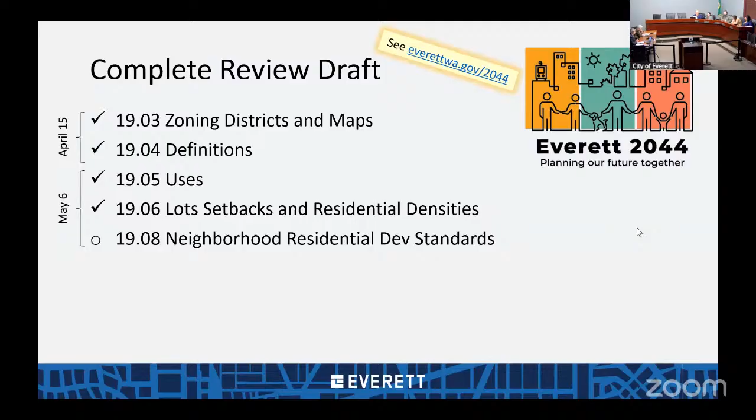Then we started the neighborhood residential development standards, 1908, which has been renamed from something else. We'll pick up right where we left off with 1908 - these are the middle housing standards - and then keep going through the rest of the chapters that are part of Everett 2044 development regulations.

That includes a couple of new chapters that were part of that May 10th book 2, parking being the most significant of them, which was a major update based on changes to state law regulating what cities can regulate for parking. There are more modest changes to the other chapters in the new set.

On the right side of your screen, you see 2 columns worth of chapters that are just code and zone reference updates. If something referred to R1, R2 zones, now it should refer to the NR zones. There are small differences in what was one and what is the other, but they're on the edges. For the most part, we just did a straight mapping from the most equivalent zone. Worth taking a look at to make sure we did it right, but there was no intention of having a substantive change to things in those chapters.

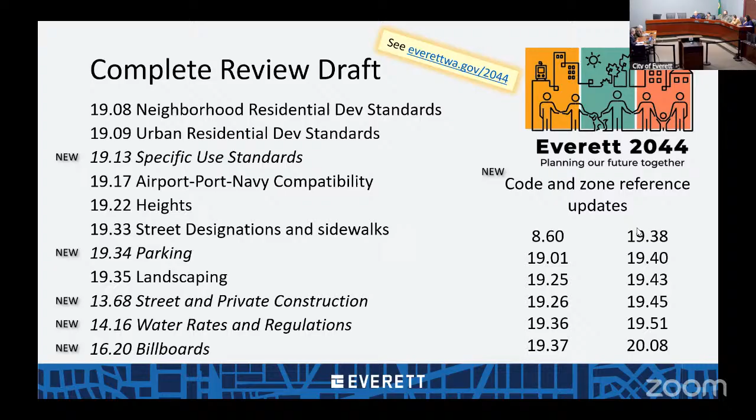Okay, so picking up on 1908 neighborhood residential development standards. A reminder, because this was a question that came up at the end of the meeting a couple weeks ago: where did this come from? Middle housing is required by the state, meaning we allow forms of development in single family zones that have not been allowed for the most part since 1956. So we had to build a whole new set of regulations for how these modestly more intense forms of residential development could fit within our existing single-family character, as is the goal of the law and the subject of many comments we've received. We used the state model, a traditional neighborhood design middle housing toolkit of objective development and design standards, prepared under the direction of the Department of Commerce with consultants Opticos, who played a part in the resurgence of middle housing recently. A lot of these things, especially around shared yards and building orientation, came out of this work, and that's all available on the Department of Commerce's website.

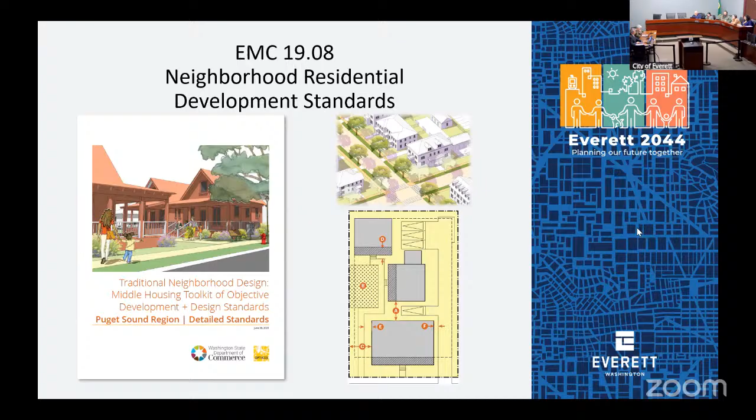Applicability of this chapter: these are development standards in the neighborhood residential and neighborhood residential constrained zones. So all development in those zones, and then also in other zones, development of detached 1 and 2 unit dwellings and townhouses up to 3 stories in height, any number of them. That is also roughly what is captured under the International Residential Code for the building codes. So this is a change. Currently, 1908 is only for the single family zones, regardless of development type. And then 1909 is standards for the bigger zones, multifamily and mixed use zones, regardless of type.

So if you're building a townhouse in the MU zone, you would use 1909 instead of 1908 currently. We have had a lot of difficulties trying to match the building style, and all of the regulations are oriented more towards apartment buildings and mixed use buildings, so they're not a great fit for townhouses. So we are revising the applicability so that all townhouses, detached houses, accessory dwelling units, and those types of things will be handled under 1908.

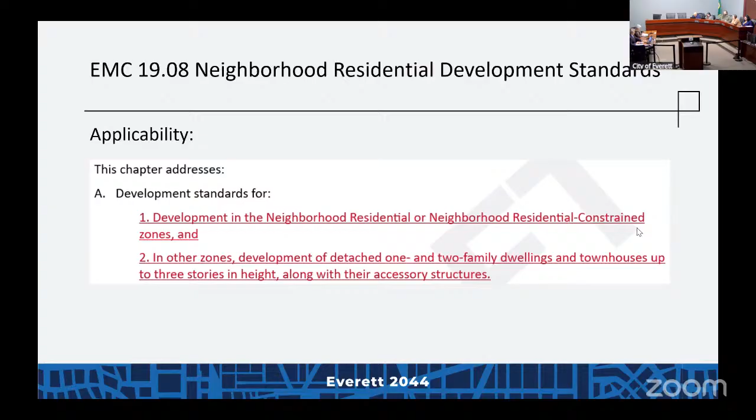Orientation and yards - this is where we left off the conversation last week. Currently in the April 7 draft, we have the top two here, not the third, but this is one we are adding and have penciled into the final draft based on comments received. For the first two: dwellings must either face the street, which includes a street facing facade with the residential private frontage type - different types of porches or entryways - or face a shared yard, which must be 15 feet in any direction, like the image on the screen there. We had some comments that alleys would make a good fronting direction as well, so we've added that provisionally for the final draft, that you should either face a street, shared yard, or public alley.

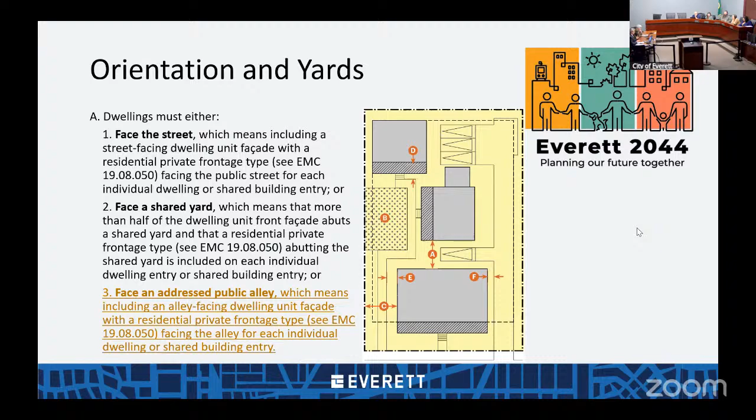Why regulate orientation and yards? We turn back to the design and development goals and policies that we worked through earlier this year, and those include some suggestions on both sides of this. We want clear and predictable development regulations, and in fact are required to. So keep in mind throughout all of this that all of our development standards for housing need to be clear and objective, and we cannot rely on administrative design review or any other sort of design review to say, is this good or not - either it is or it is not. It's not be similar, be quality, be consistent, any of those sorts of things - it needs to be clear and predictable.

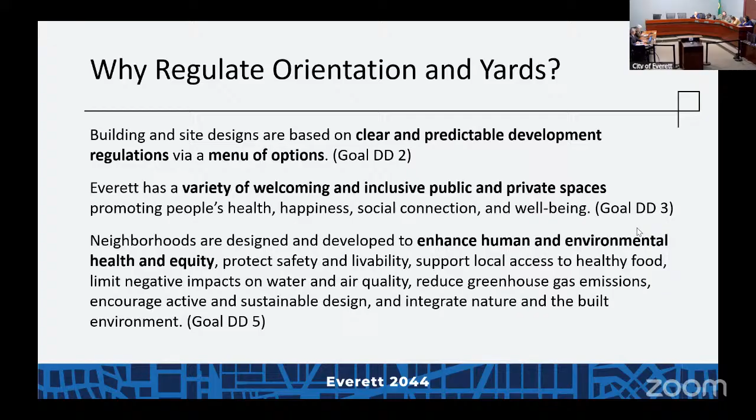We want a variety of welcoming and inclusive public and private spaces. We want to enhance human and environmental health and equity. And then I think the top policy here is probably the number one underpinning policy for some of the orientation and street fronting work we have in this document. So I will read just that one: maintain a continuous, consistent, walkable, and human-scaled pedestrian environment at the interface of buildings and the public realm. Promote interaction between indoor and outdoor activities to create an inclusive and vibrant public realm. In a nutshell, I think that is the purpose of requiring buildings to face street, shared yard, alley, and include those sorts of frontage types.

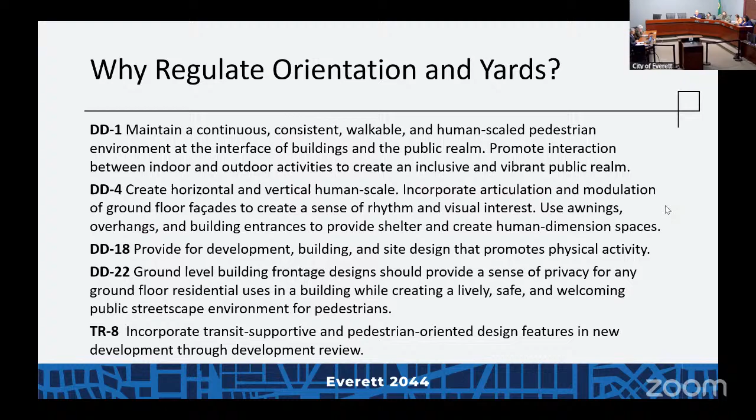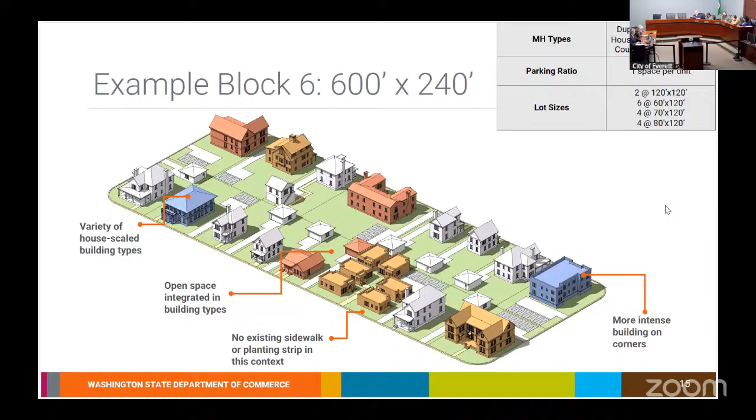Spoiler alert: when we get to the options, staff will suggest we ease up on the shared yard requirement to facilitate different development patterns, but maybe keep the buildings on the street facing the street. So this would be an example of that. If you're walking the sidewalk, you see images like what's around it, but you're not prohibiting, precluding, or limiting the buildings on the interior of the lot.

I think that was the design I was concerned about, because I see the more stacked building design more often, but that solution is good enough for me. That was what I was worried about - how do you make that back unit make sense? But if we're incorporating the shared driveway, making it shared, then that works for me.

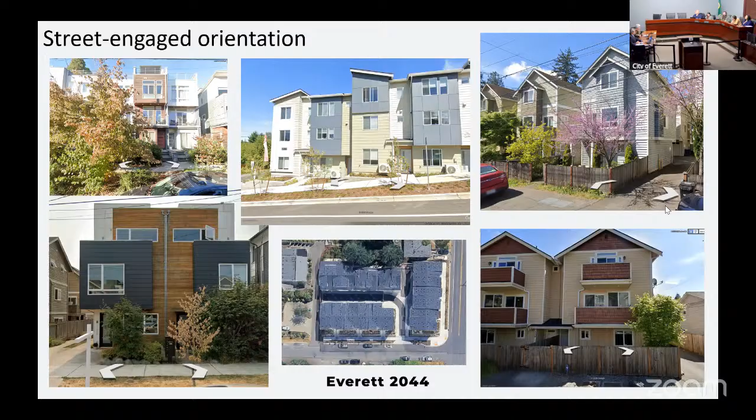Here's another one. Again, you can see how the side units frequently have less visibility, although certainly there are options of design that can have more three-sided openness.

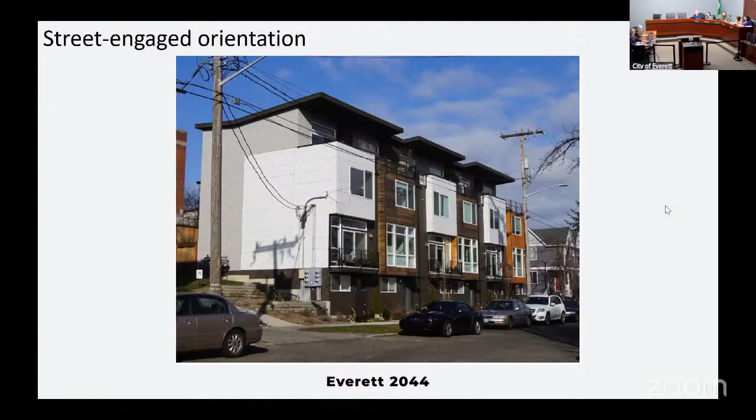Here's kind of the broadside driveway orientation that we're concerned a little bit about, the street presence and the openness, or a cold shoulder to the public street. Fewer windows, no visible entry. Usually they'll be facing, maybe it's a longer cul-de-sac that acts like a road. Every corner lot is going to have one side to a public street and one front to a public street. But for some of these, that is not the case, and it's more just a driveway. We've got an example of that next.

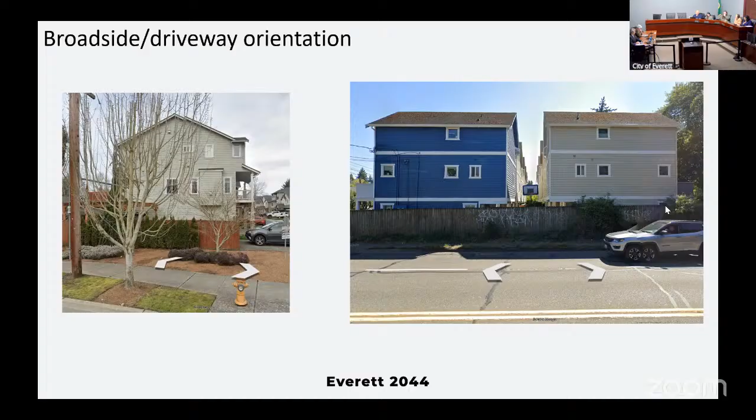Somebody, I think, mentioned this at the last meeting on 5th Avenue West. I don't know if this was the exact development, but it was in fact the exact development. Okay, I figured as much after looking around the area.

So here's one where there is a door facing the street. We need to think about, again, we set the rules and then do not have the discretion. So if you were to say include a door on the street and that's about it, you might get this. I think we do have regulations around having an entry close to, and with a porch on the corner, kind of a thing.

Otherwise, this would be an example of the kind of broadside orientation. Hold on - this is what we're saying you need to do? This is what the current regulations would prohibit, because none of these buildings face the street or anything. Okay, yeah, I just want to make sure I'm following, because this image is not something that I would recommend. Right, right.

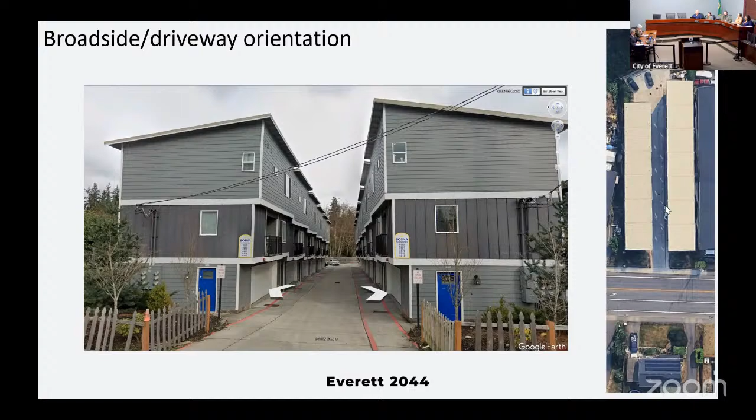But these do have more of a real door on the street, while generally otherwise facing the driveway. You can see how that kind of modulation, if that's the right term, helps break up the mass of the building and everything. You can see what it looks like from above on the side there.

Can I ask a clarifying question on this one? So under the current draft, this would also not be allowed, is that correct? Correct. The current draft with the shared yards and everything would make it almost impossible to have two rows facing a driveway. It would be more like you'd have a row and then a road up the side, and then a cluster around a shared yard, or front to back, those types of things.

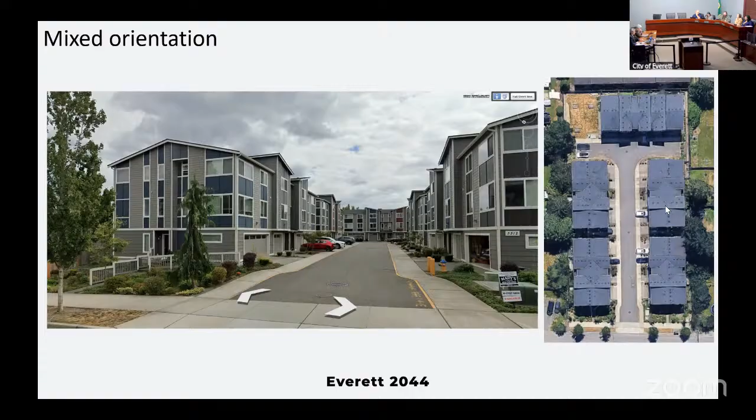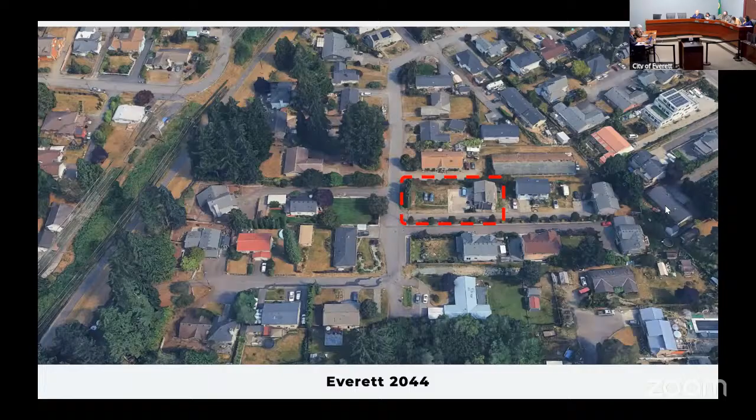And then we've got a case study in Everett, and this is a property that has a lot of the characteristics that we're kind of thinking about. So it seemed like a helpful one to bring through some of the pros and cons of different development types. There's one house set very far back on the lot, and there's a private access drive going to rear developments from a short plat, with another private access drive directly adjacent to it. Property owners were not able to share a driveway or create a public street. So the driveways aren't always touching like that, but it's not uncommon in Everett.

This is what it looks like on our GIS system. The yellow are the couple of shared private access drives and access easements, and some utility easements as well. You can see where the house here is positioned.

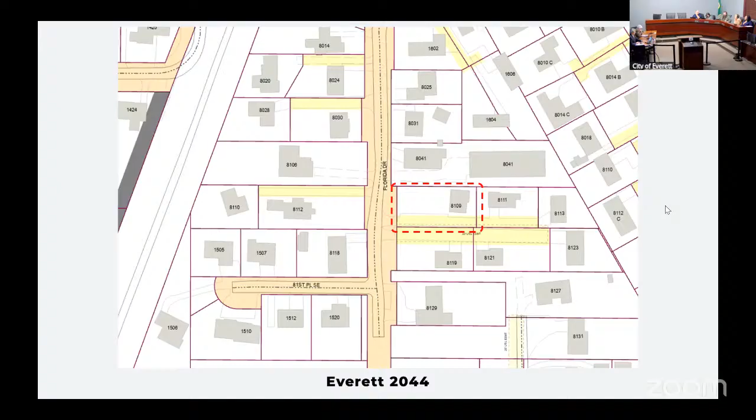Zooming in a little bit, you can see the property, the setback in the neighborhood residential zone. We've got 10 feet in the front, 5 on the sides, and I think staff is going to move forward with a 5-foot rear setback, so we can call it 10 feet if you're on a street and 5 feet if you're not. I actually picked that up from Lynnwood, who's moving that direction as well. And then you can see the access easement taking, I think it was a 10 or 15 foot strip out of the property.

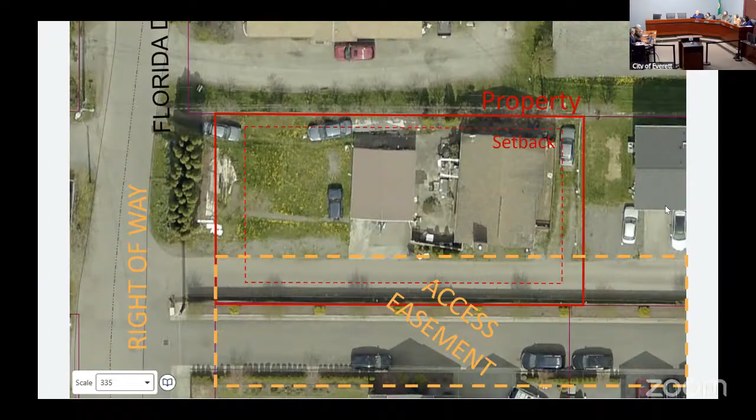So here is a proposed concept for this property that would have 3 sideways townhouses on the street with garages in each one. And then there's 1 bedroom and a bathroom on the back side, and then stairs up to the rest of the living area up above.

So this would be an example where it does not face the street, does not face the alley, does not face the shared yard. So we would have to reject that application under the current draft.

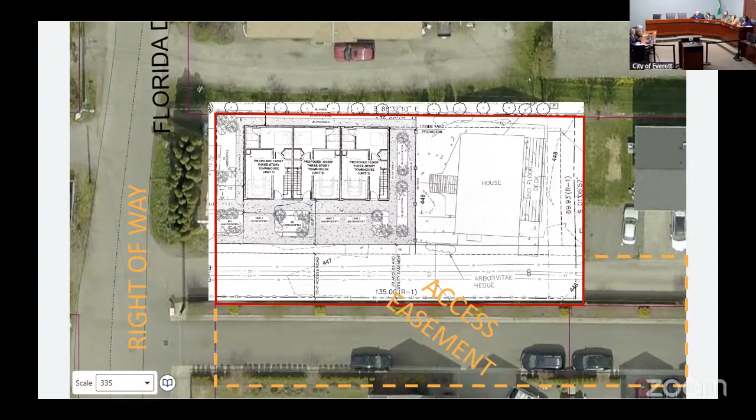So here's a rendering of 3 kind of options here. On the left would be door number 1, and that is the proposal that would be free from street, shared yard, or otherwise orientation requirements.

If you were to turn the units to face the street, you cannot fit all 3 of them. And so you would have a penalty of 33% of the housing on this project. Most likely that 3rd unit is where you start to get into economies of scale, and it probably costs less than the first 2 units, so you're probably pushing the price up for the other ones. Overall, not what we're looking for, although this one would probably have good street presence and would leave some open space for the existing units, or for all of the units, however it's arranged.

And then also, at some point, the house in the back will probably come down, and that leaves a little bit more space in the back for future development. But no denying that it is a cost to housing affordability, and a lot of the indicators we're seeking right now. On the right side is perhaps -- and this is just sketching and trying to illustrate some of the things here.

If we were to require the units close to the street, within some distance -- 30 feet, 40 feet, something like that -- to front on the street, and then everything else does not have to, then perhaps you could get to something like on the right.

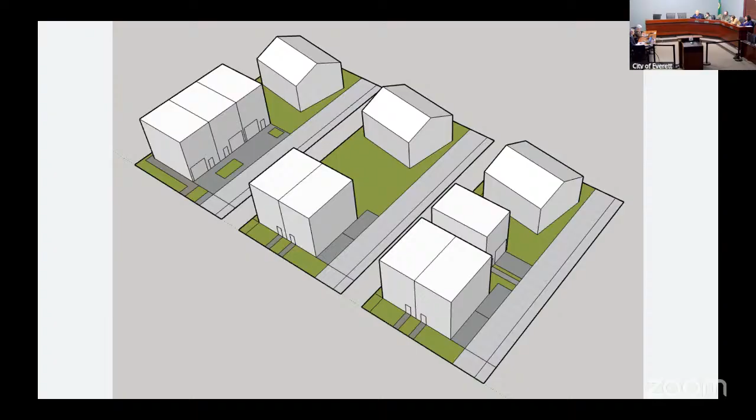On the right, I don't see how that would be possible. I guess you could have the front door and a garage maybe on that middle unit, but the ones on the street would have to have surface parking.

So comparing the one on the left to the one on the right, I would say by separating one of the units, you're probably increasing construction cost a little bit, because you're not having it all be one building -- complexity of the design, foundations, and all of that. How much more expensive or difficult, I don't know, but maybe in public comment in the next few weeks we can get some feedback on things like that.

So that's kind of staff being open to door number 3 and door number 2. We need to think about the wide variety of parcel types. A note about this street: it's a dead end, not expecting a whole lot of people walking by. But on the other hand, it's an opportunity for a cohesive neighborhood feel around that one street.

Kind of like a bigger version of a cul-de-sac. This is in a part of the city that has a lot of deep lots, flag lots, and this is going to be probably a repeated thing here. Other parts of the city, like North Everett, have more 50 by 100 smaller lots, less deep, and alleys.

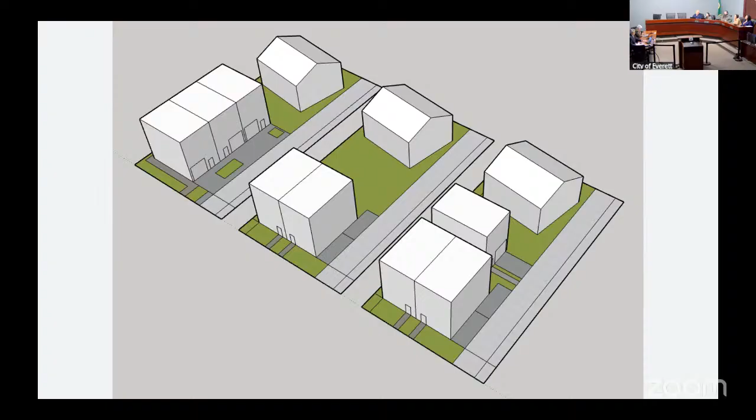So we put up a couple of options for your consideration. We don't need to decide here, but since we were talking about this a lot last week, and we heard some pretty strong opinions from the Planning Commission, we went right back to the drawing board to think about how to take a big step towards more flexibility.

The option to front on the alley was one that we already had going into last week. The second one, to only require street facing for dwellings close to the street, is something that staff would be comfortable with. Then what do you do with the yards?

Do we still have a shared yard, but you just don't have to front on it anymore? That surely makes the site design more flexible and more likely to get our housing production while still having a shared yard. Should that shared yard be in the corner, on the side, in the middle, those sorts of things?

Going to be long and linear, that sort of thing? Or is it just open space, a certain percent in any configuration, whether it's landscaping or not, or none of the above? Those are some points—love to hear any feedback that you have now.

Can we noodle on this for a second and chit chat about it? Okay, I'm trying to do a pro-con list on some of this quickly to figure out: what are we trying to prevent? Not what are we trying to allow, but what are we trying to prevent?

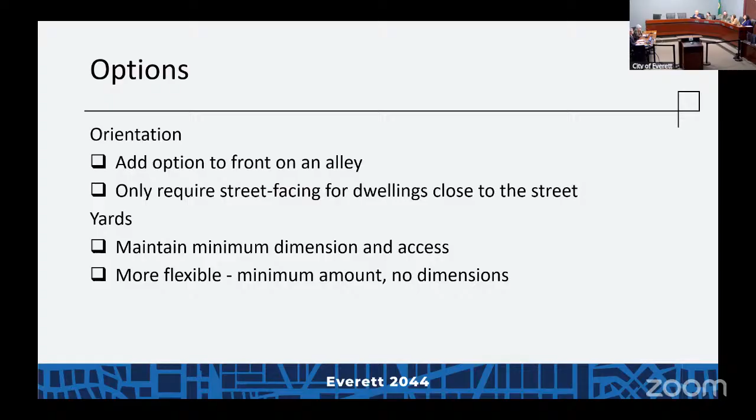Very good. Okay, we've got a lot, so I'll keep moving here. This is all about shared yards, but I think this is pretty dependent on the earlier slides, so I don't know that we need to go into detail on this. And then private yards as well.

I guess taking the temperature on open space and yards in general, do we require any sorts of dimensions? Let's say they're all private yards, or what to do with the remaining 40 to 50 to 60% of a lot that is not covered by buildings.

Are you saying like open space and/or driveway parking? Is that kind of the two things we're looking at right now? So right now we require a private yard at least 8 feet in any direction and 80 square feet, so about 8 by 10.

We have a table in our planning conference room that is exactly that size. So we use it for dimensions a lot to kind of visualize. Essentially 5 feet by 8 feet is the minimum, because we only have 5 foot setbacks.

Well, we've got 8 feet in any direction and 80 square feet. So it would need to be about 8 foot by 10 for each unit, as this draft is currently written. Front or back, or anywhere that it has direct access, including on the roof.

Yep. And then we had the shared yard—if you don't have a private yard, then you have a shared yard that's 15 by 15.

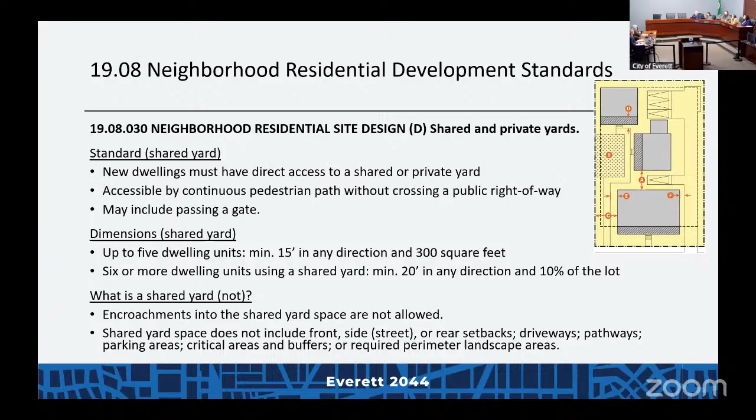Last time we discussed this, there was discussion around whether it's more beneficial to protect public green space and create walkable pathways to utilize that space, rather than requiring individual lots to have their own mini green spaces. I don't think we settled how we felt about that entirely as a commission, but I'm reminded of this conversation now. I think it really just depends on the neighborhood. That's why it's difficult to make this apply across the whole city, because a lot of the neighborhoods are so different. Do you remember that conversation?

Nathan, I'm pretty sure you were here for that. I do. Mackenzie, do you recall that? I think so — I remember us deciding that 30 by 30 was a lot, or at least coming to us with 30 by 30 was a little too much for us. We were also talking, this might be like a year ago, about the bigger zones.

That's the one that requires the 75, and this actually goes back to the park impact fee discussion — when to potentially exempt open space or reduce open space requirements if you're proximate to a public park. Where I sit on that — and we've been debating this in the planning department and elsewhere this entire time, there's no clear answer — I think in the bigger zones I'm very comfortable having the public park system carry the recreation weight, because I'm not seeing very good output from the little sad playground in the corner next to the road. That space could have been used for building and then a good park system. I do feel the opposite for the neighborhood residential zone — what else is that three-quarters of the city if it's not defined by more open space?

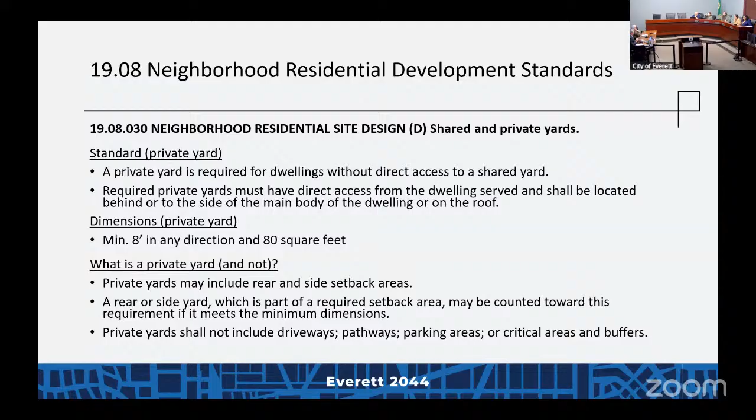Okay, these are all the porch types.

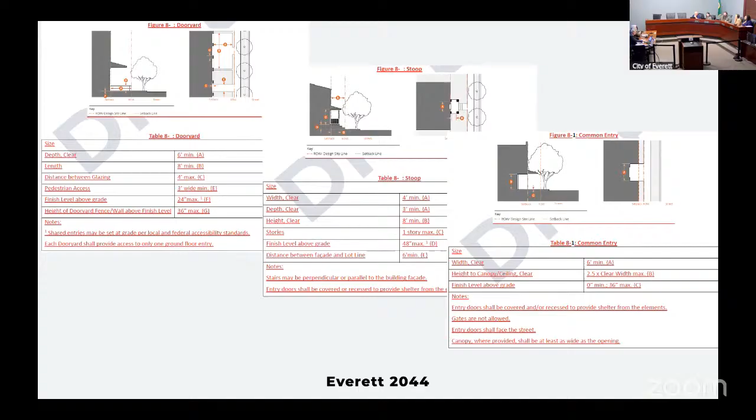Even when people are in close proximity to a park, if you're a parent with young kids, you still potentially want some place for them to be safe close to your own residence, where you can let them out for 5 or 10 minutes, or sit outside having a cup of coffee without having to transport them. So in the neighborhood residential context, that's still a valuable asset to have.

I thought we were done with 1908, but I remembered there was a section on garage requirements relevant to our discussion. This is existing language, though more applicable now in a middle housing world than before, when you couldn't really build these types of buildings. Everything in 1908-060 shown in black is existing language we didn't change, except to clarify that semi-subterranean garages are allowed to project above the adjacent finish grade by up to 8 feet. I'm not exactly sure how that works, but that's from the state's model guidance.

All of these requirements for garages, limiting them to about 50% of the length of the street-facing dwelling unit facade, used to only apply to middle housing in single family zones where allowed, but not to houses unless they were on a small lot of 4,500 square feet or less, or got a front or side street setback exception.

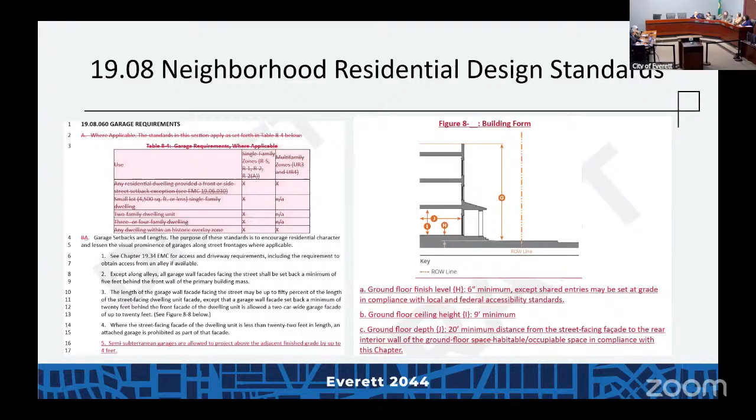And on specific residential uses, just so you know why half of the chapter is red and crossed out, it just got moved to 1913.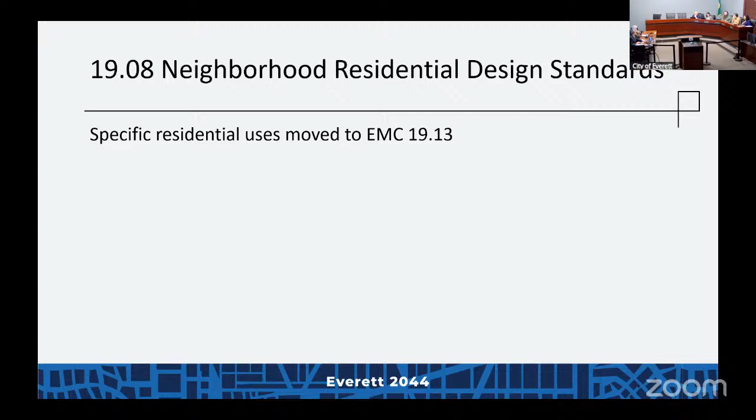This chapter is also where the inclusionary housing requirement sits for 2 areas of displacement risk in South Everett. I wasn't going to spend a lot of time on that since we discussed it in earlier pieces, but if you'd like to, we could.

Just a quick question on that. We did hear from a lot of folks in the community in those areas at risk for displacement, and the recommendations brought to us through that community engagement process - is there any part of those recommendations that we are not choosing to incorporate?

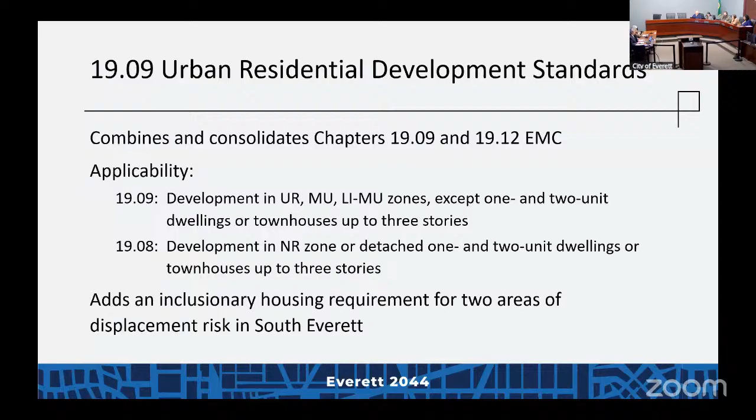Is it owned and controlled, or just owned? Because control is different if it's already built. Owned or controlled - that could include land that is leased by long-term lease, which would be controlled but not owned. I think those were the two main ones, but otherwise we got the other ones. My apologies to the community if I was missing something - we will be rereading through all of that in this final couple weeks.

Okay, building modulation, more flexibility. Existing regulations have upper floor step back requirements that have been driving architects crazy ever since I've come to Everett. You can see some images of what that looks like - these are 140 foot by 200 foot lots if you were to build all the way out except for the last 3 feet of your property. On the left side is 7 stories, on the right side is 25 stories, so UR7 or MU25 would be examples. You require a step back at 10 feet at floor 4 or 5, and then another 10 feet at a higher floor.

Lots of downsides to that - water intrusion problems. You want to have all of your units stacked so the plumbing goes up in a straight line and all kinds of things. Yes, it brings some architectural interest and can provide some balconies, but there's an overwhelming negative response from architects and not a whole lot of value that we see.

We are in no danger of canyon streets with the width of our streets. So we proposed pulling that back fairly substantially and instead just requiring, with eyes on the street in mind, some sort of balcony or outdoor area 8 feet deep on 50% of the horizontal distance, somewhere at floor 2, 3, or 4. We were trying to hit the break point between concrete and wood so you didn't have the water intrusion and stacking issues. And your required outdoor amenity space may as well overlook the street, where again you can have some eyes on the street.

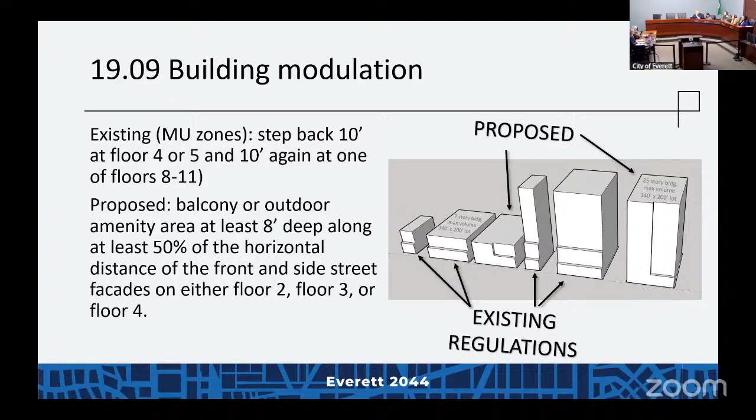Yes, thank you. We have scratched our heads a little bit on this - it came out of Metro Everett, came out of some other things. It's tough because we don't know who really wants this, so if they're out there, come forward. You've got 5 weeks, otherwise this is gone. Sounds good, okay.

We removed a couple others that have been frequent, and a lot of these standards are modifiable, so you can request a deviation from it, and we have been granting those deviations, finding that it meets the criteria.

We require that residential building facades look like a series of buildings no wider than 50 feet each, proposing to remove that. Removing a requirement for some balconies and balustrades to be opaque. I think this was so that you can't see into a neighborhood residential zone next to you, but it didn't seem to really serve that purpose well, and actually can be negative in that sense.

In our air quality work, reviewing the plan against the environmental review process and looking at pollution burden and things like that, a lot of research went in. I think we talked about this in the Planning Commission.

So a lot of research on proximity to high traffic roadways shows it's very bad, especially for kids. We did not get to any sorts of restrictions on childcare on Evergreen Way, which is something that still kind of bothers me a little bit, because the research is pretty strong on the negative effects. But at least the playgrounds or that open space required for a building should be on the other side of the building from something like Evergreen Way.

We reduced the dimensions for the private open space required just to better fit a reasonable, common, economical balcony size. So it doesn't have to be 6 feet deep, it can be 4 feet deep. And then I think that was 4 by 8 or something for the balcony size there.

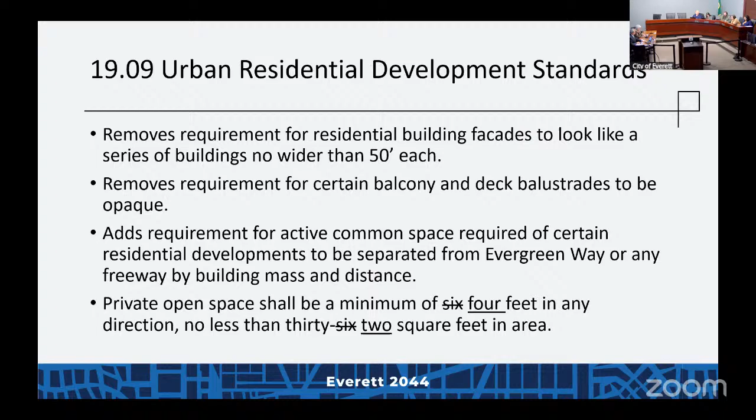We removed the restriction on ground floor residential on TOD streets — Pacific, Everett Station, a lot of other places. We definitely want to see active uses on the street — healthy city, vibrant streets, eyes on the street. But simply prohibiting residential does not seem like the right way to do it. You're more likely to get blank walls, and not everything can fit commercial. So we did not add any new requirements to fill that space, but we did remove the prohibition on ground floor residential. That's actually in 1905, but it really impacts these types of buildings.

Is there any prohibition — it seems weird to me but I'm saying it — if you have a longer street-facing first floor, that some of your building is residential and some of it's commercial, no prohibition against mixing those two ground floor uses at all, right? Building code might make that difficult in some way, but nothing in the land use code, and maybe not even the commercial code at that point.

That number applies to buildings here in the commercial code. The table that you see on the bottom is existing language that requires minimum building depth on the ground floor, and that would be building available to any use.

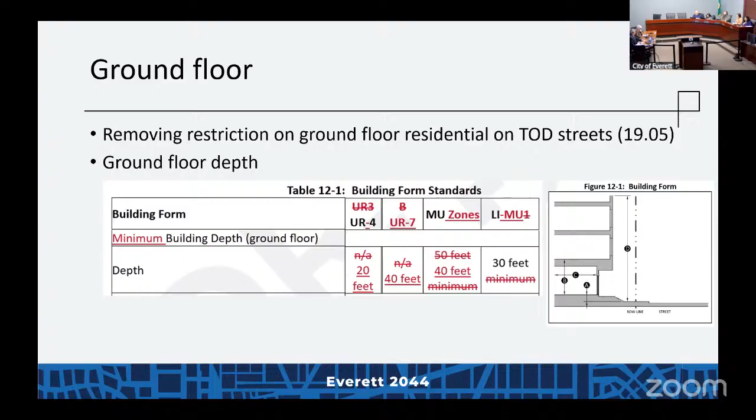Then there is this table 12.3, with a lot of standards for facades — I don't know how to summarize this other than to put it up on the screen. I note that the business zone being collapsed into the mixed use zone means that some parts of Evergreen Way and Everett Mall Way earned themselves some articulation requirements and blank wall standards. Otherwise, no change to the MU zones or the UR zones.

Is this where — sorry — the window requirement for large buildings, transparency? Yes. Is that in this section or a different area? That is in this section. Did we reduce that 90% number? I don't think we did. I think that's something we've heard frequently, that especially the 90% is bizarrely high. That is in the table that I mentioned, where I just found the duplicate.

So it's in 1909, and was in 1912, and is also in 1934, the street designations. So there's a chance it says one thing in one and a different thing in the other — there were already some discrepancies between those two that we needed to clean up. So we'll be deleting one of the tables and consolidating into one. Weather protection and transparency are the two — we get more concern about transparency just because of the cost and the energy code.

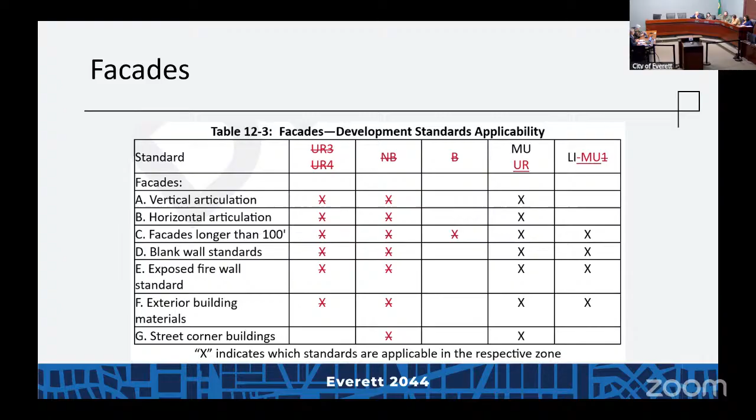Structured parking - these are existing standards that only regulate the front building facade, and we're proposing to make that apply to both front and side streets. The front is always the narrowest side. You'll see there's a couple developments - one being built right now on Pacific, and a couple others in the pipeline that are long parts of the block. All of these standards that had applied only to the front building facade only apply to the Pacific side, but not at all to Rockefeller, Lombard, and all the rest.

That seemed like a big miss for what the goals were for these, so we just crossed out 'front,' which will bring in the side street applicability. This only affects corner properties, specifically the ones that are long and skinny, full block ones.

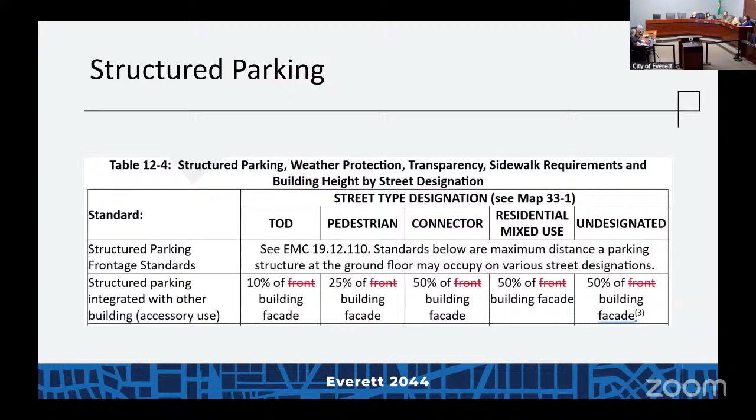Okay, that was 1909. Anything we wanted to go back to? I think we're doing pretty okay on time. I did have one question.

I know there's been some public comment focused on North Everett, like the 19th corridor we were talking about, and that turning into UR4, and how that interaction might look with the rest of the residential neighborhood, like what the transition between those two zones might look like. I know we've talked a little about transitions and heights, but as we're talking about 1909 versus 1908, just wanted to talk through that.

The transition, I don't think we have it—it's on a future slide, so we'll see if there's a height reduction for adjacent, but they're so similar: 45 feet, maybe even 40 feet in UR4, 35 in NR. And then there's the 100% lot coverage—I was working this out earlier today. UR4 has no front setback, but 5 feet on the side and rear. If it were a 5,000 square foot lot, that already drops you to 75% lot coverage, if the math was right, just because you can't be in the setbacks. So now you're talking a difference of potentially 60% to 75%, 35 feet to 40 feet. And it's hard to get up to 75% with driveways and parking areas already set, or the 100%. So I don't see those two... In fact, UR4 is kind of designed to be the middle ground between the taller zones that have some compatibility concerns and the neighborhood residential. I don't think there are many special treatments, but that would be one to look at the landscaping chapter for.

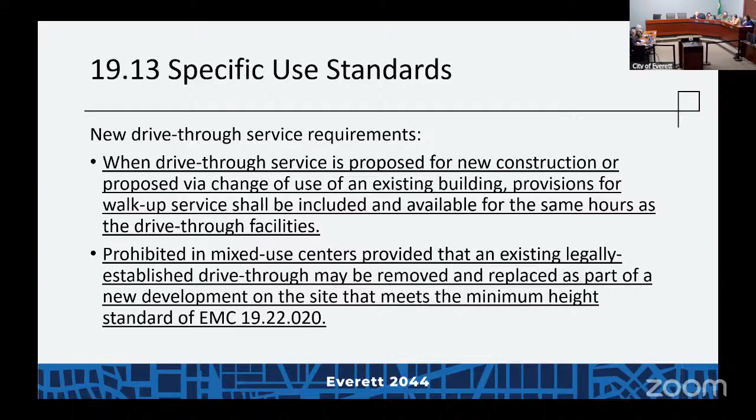I think that's that. Keep cruising—airport, port, Navy compatibility, we've talked a lot about, so I think we could probably breeze through this one. But I have very exciting news: the Rucker Hill neighborhood and the Port of Everett have come to agreement on terms between the two sides. So that will be folded into the final draft, and that will discharge that specific amendment request. I feel like there should be a confetti burst or something. We'll ask them to blow a foghorn or something.

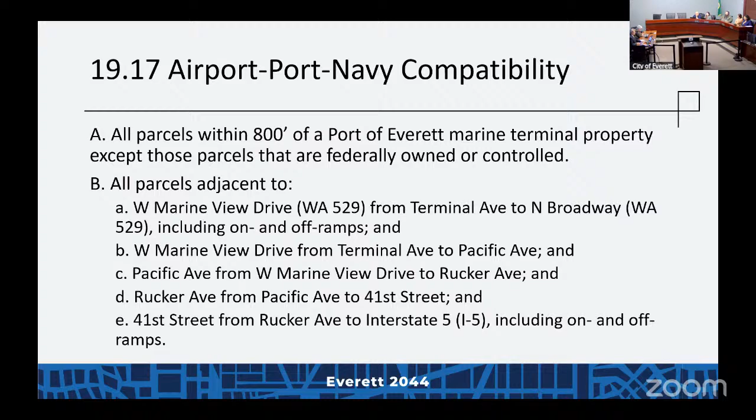Okay, heights. Again, we eliminated the building height map. We have an intended number of floors and a maximum in feet. The intended number of floors doesn't really do anything now, but it puts on paper what the intent was.

One example is we're learning about modular construction, which has taller needs—I think it was more like 12 feet instead of 10 feet. So that means if you're building modular, you cannot quite get 7 stories in the 75 feet that we have in the UR7 zone.

I don't know that we want to make changes to the maximum height at this late stage, but by putting the intended number of floors, that can be a guide to smooth the path later down the line, or maybe with administrative deviation requests or that sort of thing.

The formula we used for converting the number of floors—UR7, 7 floors, that type of thing—is 10 feet per floor, and then 5 feet on the ground for residential zones, or 10 feet for mixed-use zones for a taller commercial ground floor plate.

Light and heavy industrial zones were set to a flat 100 feet, not often reaching for the sky, although they do have cranes and smokestacks and things like that that fall under this. The light standards at the Norton terminal at the port needed a variance, or maybe it was just the industrial waterfront height incentive. Either way, light poles count as well, not just buildings.

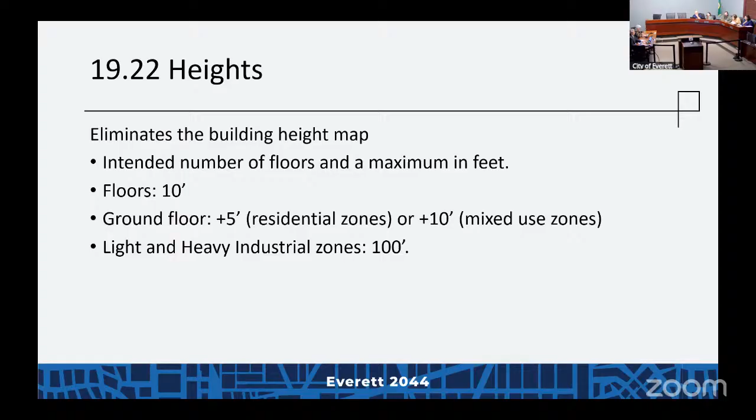So light and heavy industrial zones, 100 feet. For the most part, these are not going to be objectionable to anybody, but we have waterfront industrial zones all around, and in our current building height map those have lower heights. Existing is about 45 to 75 feet, and then the additional 20 feet for certain uses with a view analysis. That's what the port used for the light standards at Norton Terminal.

We were proposing to replace—since we're dropping the height map, you need a height limit for the light industrial or heavy industrial zone. So we went with the higher end.

But in the waterfront, recognizing the view implications and the shoreline implications, we're suggesting some trigonometry or geometry where you start at the street at the top of the bluff, 10 feet below the center line, and then you go 40 feet above the ordinary high water mark, and that's your plane of height. So taller closer to the bluff where you're less likely to interrupt the views, shorter closer to the water.

The port is probably one of the most sensitive to this because of their need for cranes and other tall things. I think this wound up with a slight decrease in their height right at the shoreline that we need to take a look at. We're working with them on that. That could involve the additional 20 feet for certain uses with view analysis. Those certain uses are water dependent uses, and the view analysis makes sure that you're not going to block a substantial number of Olympic mountain views.

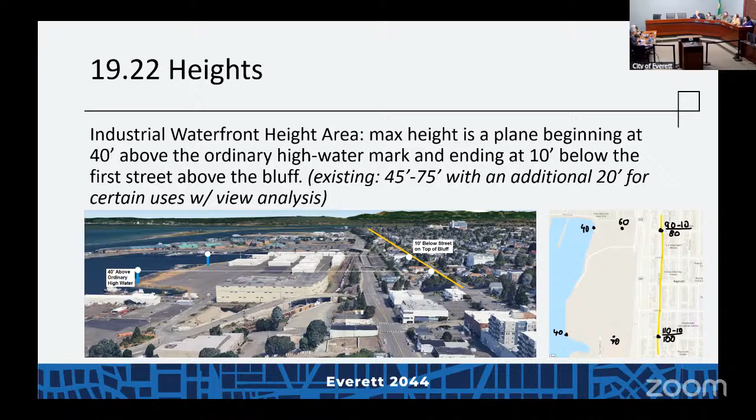That's around the light standards. Right, light stand, and we have a view analysis from several streets and everything.

Here are the height reductions. So from the development site zone—this is the one that UR4 is not in, but if it was a UR7, and there are not many because we have mostly the wedding cake style—where you have a UR7 development site and the neighbor is an NR zone, for 50 feet into the UR7 zone you would be limited to the 35 feet of the NR zone, so that you would limit the very tall buildings next to very short buildings.

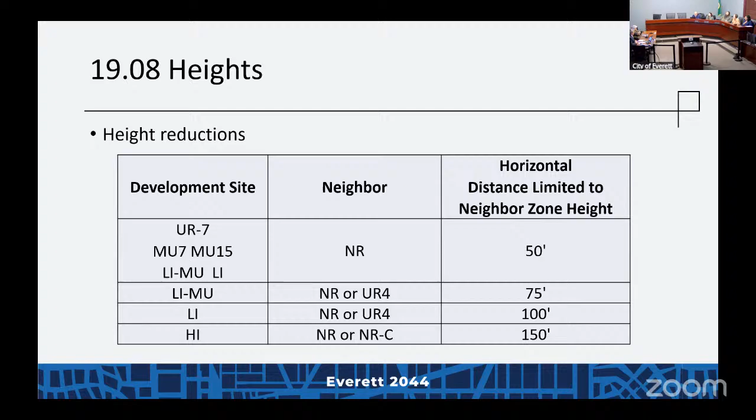This is pretty similar to what we have now, just with the new zone names.

From height reductions to height incentives, we removed the entire development height incentives program. We want people to build taller buildings more efficiently. They are more expensive—it seems a little bit backwards to require them to pay for what we're looking for. So all of the height limits are now by right.

If we want the things—one of the height incentives was affordable housing, you could trade it for your height incentive. Now instead, you could say that we require that affordable housing where we need it, instead of only requiring the tallest buildings to pay for it. We've got these two questions that I mentioned, and we're going to suggest adding the one-story bonus height for religious organizations, and then adding back the industrial waterfront height increase for the port.

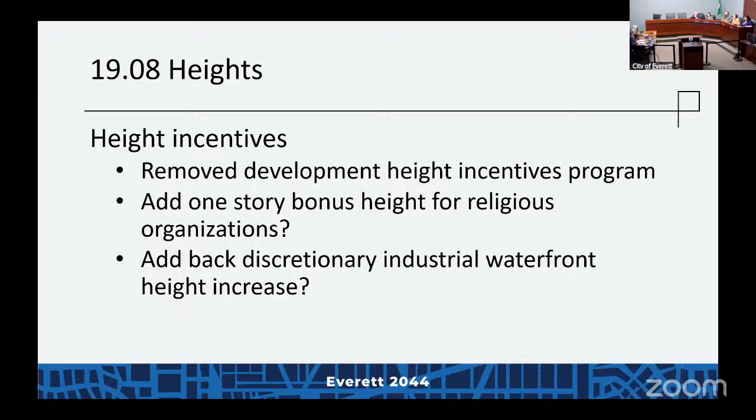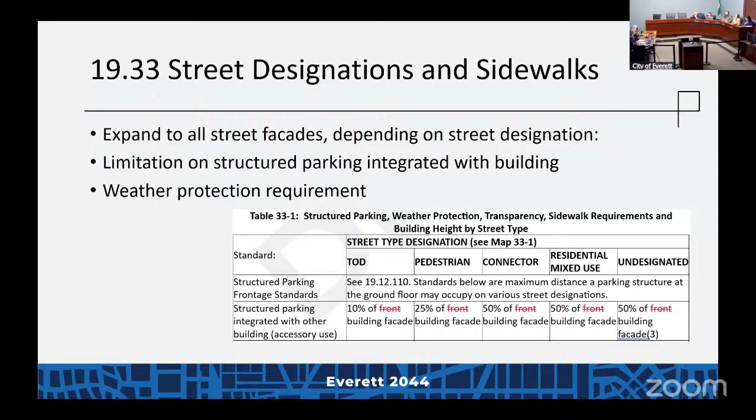Street designation—we have talked, this is the other chapter that the same table is in, from 19.08. So I think we talked through this already.

I'm rushing a little bit to try to get to parking because that is brand new. We've talked about most of this before. Landscaping—we turned up the dial a little bit on trees, instead of 30 feet apart, 25 feet apart in type 3 landscaping areas. Some new street tree requirements in neighborhood residential zones, where currently, for the most part, you need to do a land division to trigger that. And since we don't do all development via land division anymore, that was missing a whole lot of trees in a whole lot of the city.

We do not have tree retention requirements as part of this, so turning up the dial on the trees and landscaping seemed to be an important mitigating measure. Okay.

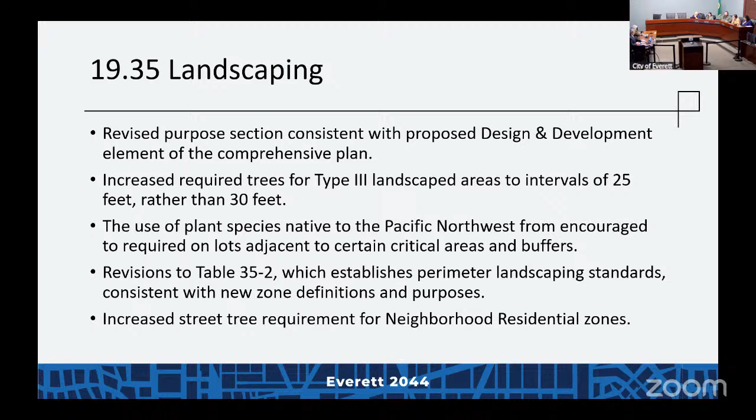Frontage improvements. More development on streets without sidewalks and without full streets built to standards. We started by writing this in as all residential development would require frontage improvements.

We have, still since, in response to comments, exempted 1 or 2 accessory dwelling units on a lot with the principal unit to remain from the frontage improvement requirement. That's a little bit of a turning down of frontage improvements.

It used to require frontage improvements when development resulted in 3 or more dwellings, but the sidewalk improvement area, shown in blue, is a big chunk of the city. In that blue area, all development of 1 or more residential dwelling units, excluding accessory dwelling units, is included. So in the blue area, I think this does not represent an increase, but in the non-blue area, it does represent an increase.

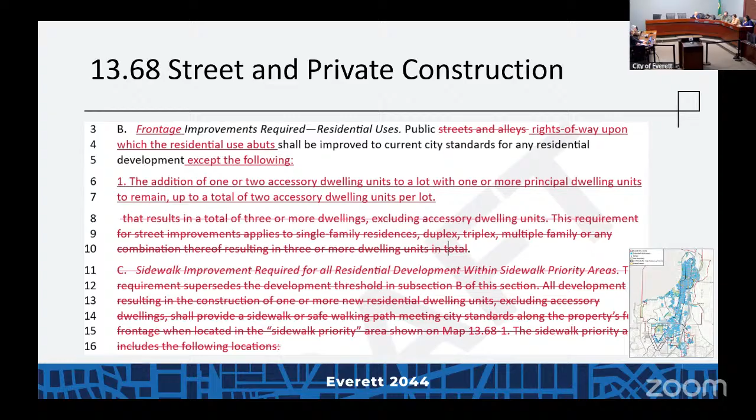1 meter per dwelling unit. I don't deal with utilities very often, so I'm not sure how often they have discretionary reviews. I think it kind of varies currently, but maybe this is a new standard. If this is a problem, we would love to hear that.

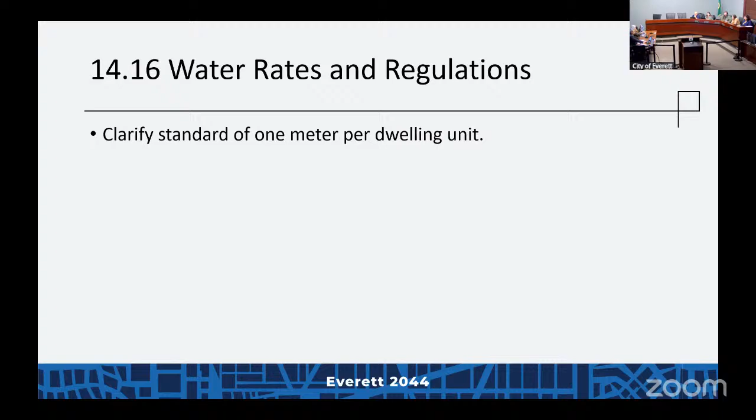Billboards are allowed in certain zones, and none of those zones exist anymore and haven't for a decade. So we have already effectively prohibited billboards, and there's an ordinance that says we want to. We just finished the job here.

Parking, and I think we can linger on this one a little bit longer because this is the last pretty substantive one. All of this comes from Olympia.

2024 Senate Bill 6015 had some required dimensions and surfacing and all of that.

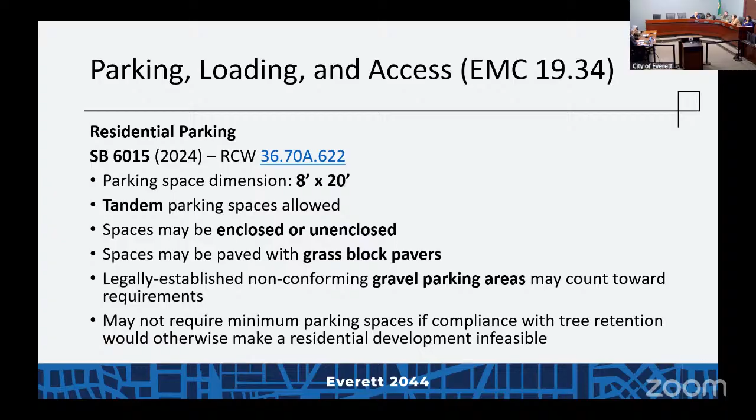2023 accessory dwelling unit legislation prohibits cities from requiring parking within a half-mile walking distance of a major transit stop, and then also a max of 1 space per unit on lots smaller than 6,000 square feet and 2 on larger lots. There's a table in your memo at the end that puts this all into one place. Major transit stop means rail, Swift BRT.

ADUs have a different definition of major transit stop, which was dizzying, literally dizzying. ADUs only have a different definition of major transit stop, which is frequent transit, meaning 15-minute service, 5 hours per weekday, which is different than for other housing. Major transit stop for other housing is rail and BRT.

That is where major transit stops are. So in these areas, we may not require parking for accessory dwelling units.

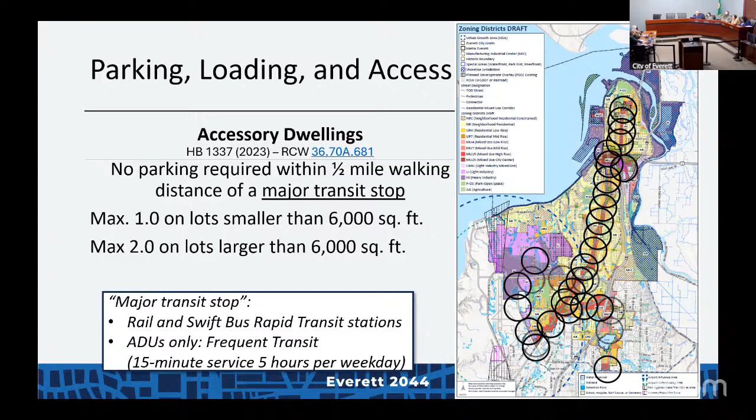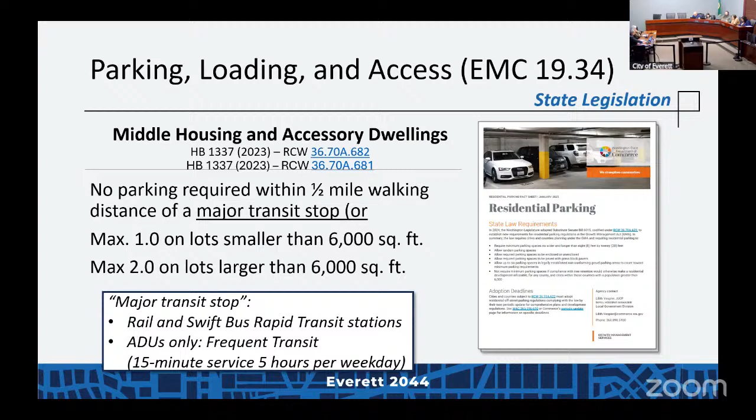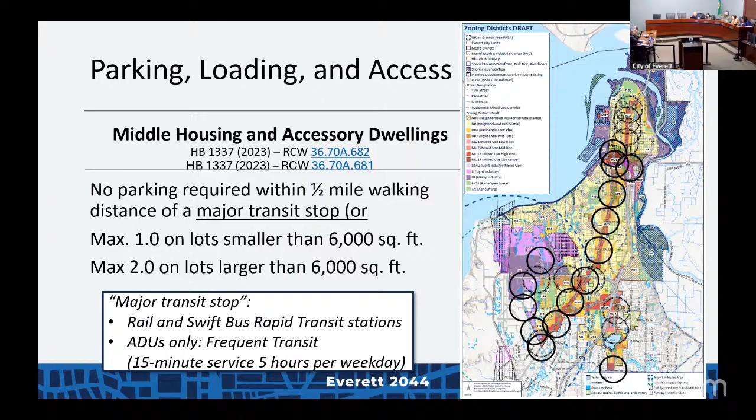And then for middle housing, no parking is required within a half mile of a major transit stop. That's the other definition of major transit stop, which is rail and bus rapid transit. The lighter circles are where planned BRT routes will be, but are not in place currently.

And then, proximate to frequent transit, or very and extremely low income housing, and seniors and disabled housing, have these parking limitations on what the city can require for parking as well. Note that all of these are circles, roughly a half mile.

It's actual walking distance, which is usually more like a diamond shape in a grid system, or a funny shape elsewhere. In almost every case, it's going to be smaller than the circle containing it.

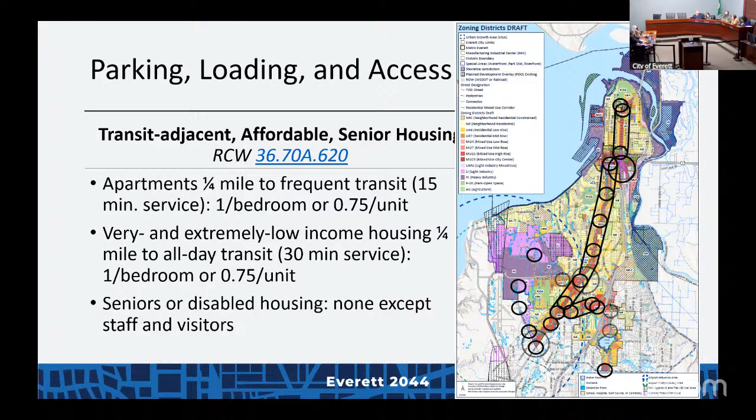This one was since superseded by this year's Senate Bill 5184, but it is still effective for 18 months, I think it is.

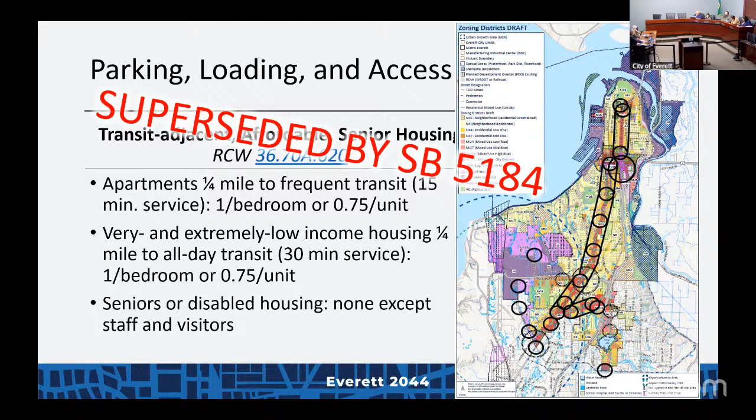5184 is the most stringent of all of these, just passed the legislature. It is due for the city in January of 2027, and it caps parking requirements at 1 space per single family dwelling unit, half a space for multifamily dwelling unit.

Interesting that middle housing was not included, given that the legislature itself just created middle housing by legislation. And then no parking at all may be required for dwellings under 1,200 square feet, which includes all accessory dwelling units. Also for affordable housing, senior housing, small commercial, childcare, change of use, and ground level non-residential space in mixed use buildings. This is a big one, and we wrestled with how close to come to compliance with it.

We have 18 months. This is brand new to us. We did most of the housing and just a little bit of the commercial side, keeping with our overall focus on housing, but wanting to maybe use that year to better understand the commercial implications.

I got a quick question. When we talk about middle housing and multifamily, what separates the designation there? I don't think middle housing is a very wide spectrum of ideas.

Middle housing is defined in state law as duplex, triplex, townhouse, cottage housing, accessory dwelling units, sometimes detached houses, yes.

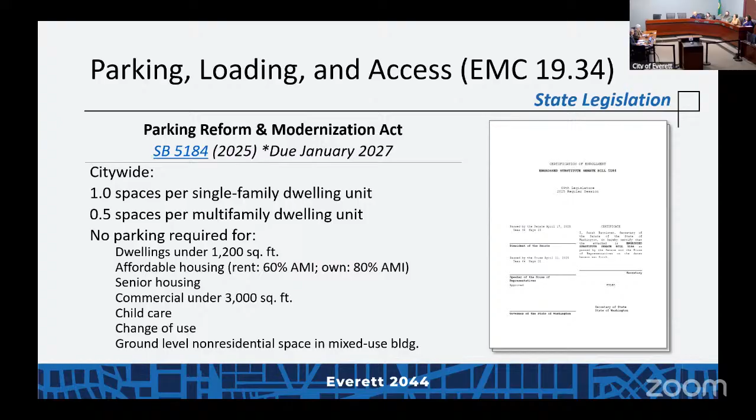So high level, you're saying let's circle back in detail, like you want more time to digest this on the commercial side? No, we have it included on the residential side, but on the commercial side we're suggesting that for now.

I have one quick question though on this last one. It had childcare listed as no parking required, but then I see in a later slide we talk about it. I wasn't sure if they were in conflict, I didn't understand. We can wait till we get to that slide.

Sure. Yeah, I think we proposed eliminating the requirement for basic parking spaces because we're also in a childcare crisis of some sort now, but loading spaces were included, I think. Okay, that sounds great.

So when it comes to parking, we talk about the ADUs and no parking required, but under current city code, if you remove parking from the main house, you have to have house parking for the main house. Because let's say you have a garage on an alley and you want to destroy the garage, put an ADU up - you destroy a 2-car garage, right now by code you have to supply 2 parking spots from the alley, from the main house.

Correct. Even though the accessory dwelling unit might be exempt for its own parking, you would have to replace the principal unit's parking. That's correct, and that would still be required.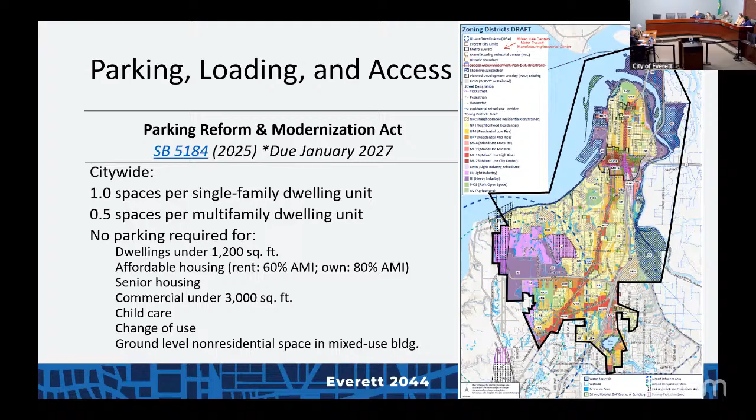I have to look at it. Hold that thought, no problem. A couple down, I'm not even sure if I have this in the slide.

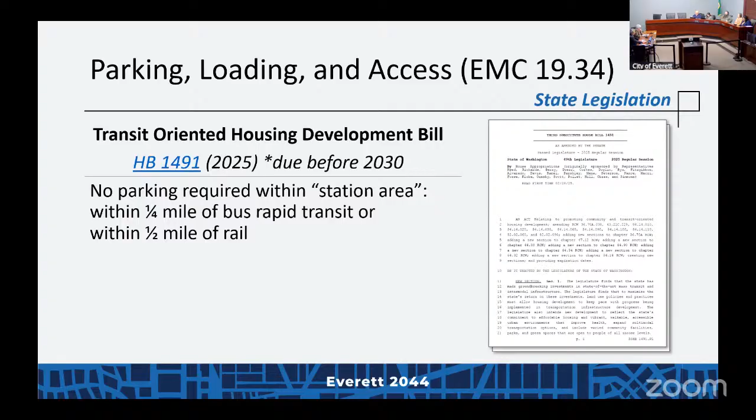One more piece of legislation - we have a little bit longer for this, 2030 - within a quarter mile of BRT or a half mile of rail, no parking required at all, for areas within these circles.

Okay, here's what we have proposed: a baseline of one space per dwelling. If you're within a quarter mile of frequent transit, that is down to 3/4 of a space per dwelling. No parking required for middle housing within a half mile of major transit.

I think that captures that North Everett, if it's close enough to Broadway, no parking would be required. Let's say it's not within a half mile of major transit, you would require one space per dwelling, which would be the house.

But the ADU would be exempt because it's under 1,200 square feet, if it is an ADU under whatever that threshold is. So in that case, if you took down the garage and built a unit, you would need one space for the combined if it was under 1,200 square feet. If you took down the garage and it was 1,500 square feet, you would need two spaces. And that goes down from there if you're close to transit.

That's to the transit stop, walking distance, yeah.

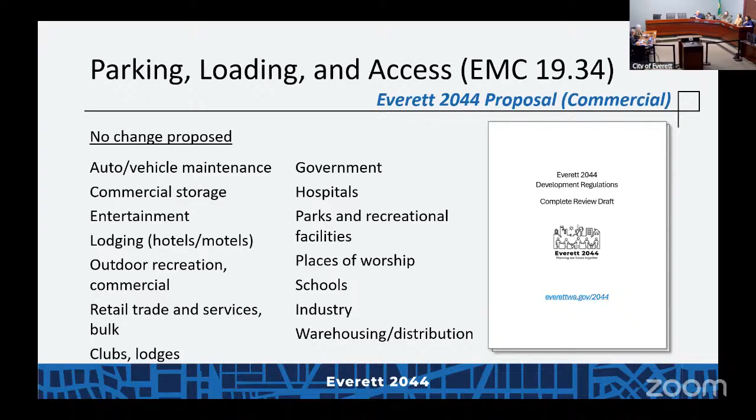No, here he is - the ones that are highlighted will need to be reduced within 18 months. So these are the ones where we said, and that's why daycare center is highlighted - fill out the proposed column there.

We will have to look to 1922 in book 2, which I don't have in front of me, to see what was written in for daycare center. I believe it is deleting the greater of 1 per 10 children and all of that, but it does still require 1 loading space per 20 children.

I believe we did not change food, beverage, athletic facility, office, and retail trade, but recognize that we will need to.

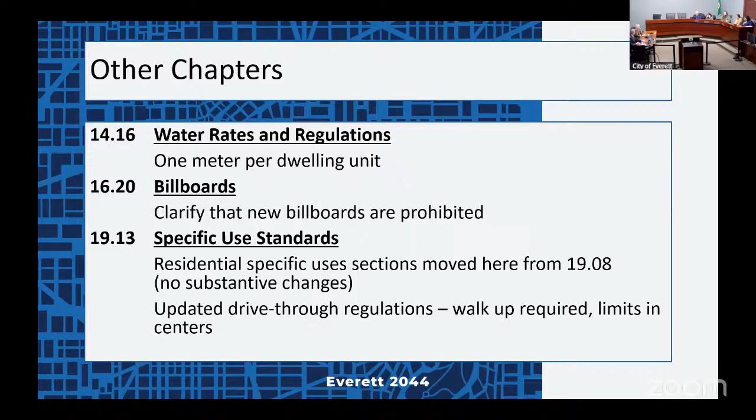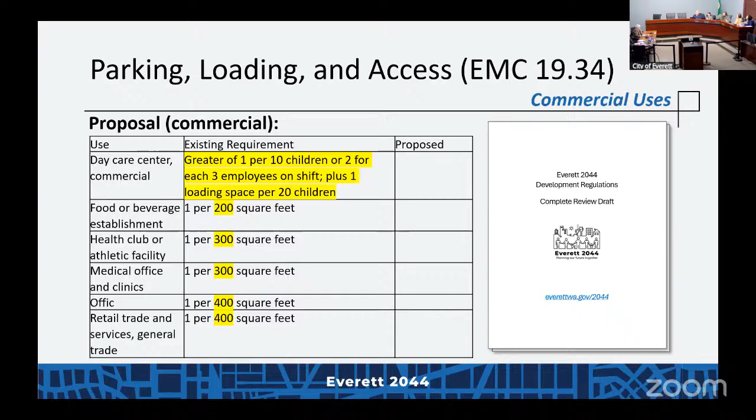That's it - these are updated zone references. So I'll go back. I'm looking at parking requirements - if you have to reduce them so much in a transit area, I'm looking at downtown here. Does this affect the idea that we're going to have limited parking for any of the big living structures that go up? So is everybody going to be parked on the street? Then is that going to limit people shopping?

Yeah, they cannot park on the street. For the most part, it's time limited parking. Okay, and everything.

I would recommend that apartment buildings downtown build parking, because it's going to be many people, and some will do just fine without it, but not everybody - and it is a long walk to the nearest parking space where you can leave a car overnight. We will not have maximums or anything to prohibit or discourage parking. It will be flexible, market-based.

Commissioner Shelby and I are both going to talk about how the market will decide this. I think the market will decide this, but I need my parking personally - I will not spend if it doesn't include the parking situation that I like. And I think that is what we are relying on the market to produce: for people to choose what works for them, and for developers to find it not viable if they're not meeting the needs of the market.

That's what I was going to make sure - that flexibility was there to have the parking. That's what I wanted to make sure.

Yeah, and if we're not going to go to zero, like a number of other communities have, let's just rip the Band-Aid off. Let's do the changes we need to do now in residential, take everybody down to 0.5. Don't deal with the ramp - we can deal with commercial next year or whatever - but take everybody down to 0.5. You have one standard for everything in residential, just deal with it.

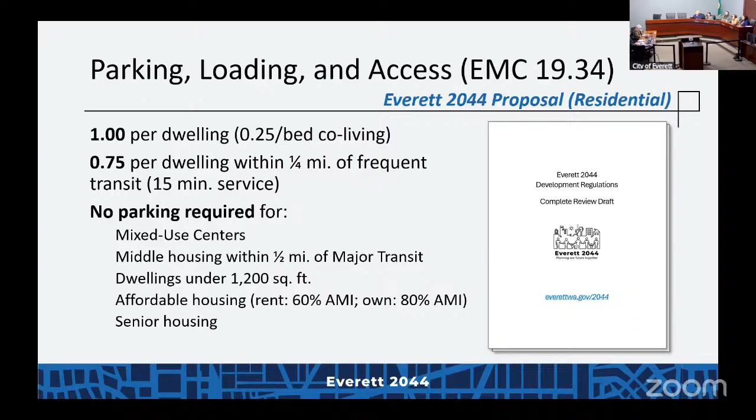Okay, is that the end of the presentation? That's the end of everything. Back to the next steps.

I guess, if we have any energy left, let's think about what we do for next week. We plan to publish the final draft and the ordinances - we'll take all of this feedback into account, as well as all the public feedback we're getting. So that's next Friday - you can expect to see the next and final iteration of the whole thing, the plan regulations. We'll get that comment report out so you can see summaries and details of what people have been saying. You'll have a public hearing, and then make a recommendation. So I don't know if there's anything you want to discuss among yourselves about how that goes, or we can just see you in a couple of weeks.

Just go with the flow. Okay.

Will there be an opportunity for us to swing by and pick up a completed printed one to review? I won't be here at that June 3rd meeting, but I want to at least read through it in its entirety to make sure there's nothing that comes up. I feel like we have discussed and discussed and discussed, so I'm looking forward to finally having an opportunity to recommend. Yes, we'll get you that. Does anybody else want one? I think it's on Friday and we mail it, it could maybe get there. We could definitely have a copy.